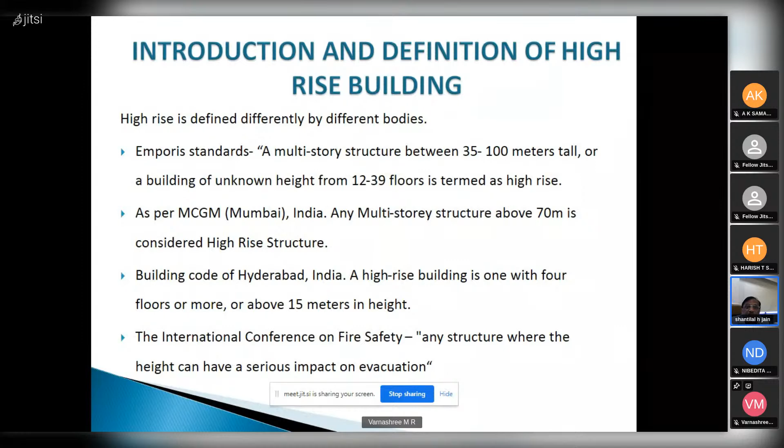The planning and then structure. Next slide can be taken. Next slide, please.

High-rise development: basically we have to consume FSI, and for that we are going to big heights. So planning, architecture and structure. After planning comes into the picture. In planning, small buildings don't play a very big role. We can have any type of structure, any type of layout, but the moment we go high-rise, the role of structural layout is very important.

Unfortunately, our architects feel that they know everything and they don't take structural layouts into consideration while planning, and they give it to structural, and structural engineers are in deep trouble to adjust that. And our engineers are very expert. They are trying to adjust. Then they ask the architect to change the plans, etc. So it is advisable that planning and structure both go together, especially for big buildings, tall structures, say 10, 20, 30, 40 stories. Next slide.

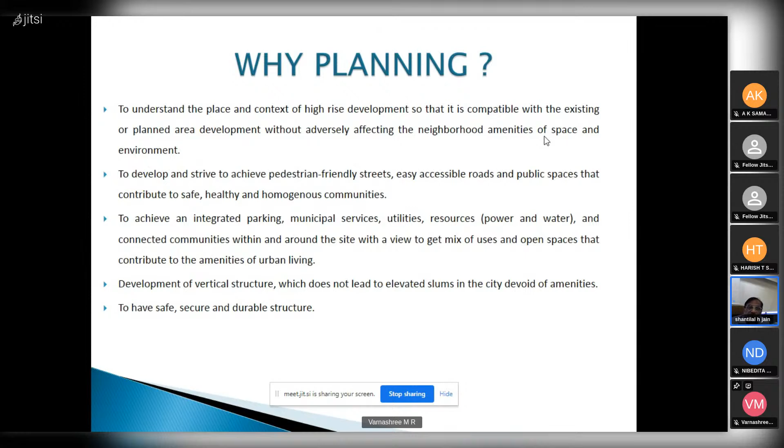These are the people we normally need: architects, structural engineer, PMC, MEP consultant, because MEP also has an equally big role in buildings. We have a lot of firefighting issues, water issues, lift issues, electrical matters, and these are to be designed properly at the time of architecture. Otherwise, what happens? The building becomes a mess.

After architectural and structural, sometimes what I have seen in the past, the building starts and after 5-10 floors are constructed, then we come to know that a lot of cutouts, a lot of openings, a lot of things are required to help the MEP people. So all four teams should come together. PMC, the person who studies drawings or site management, comes under our team; architect, engineers, MEP issue them drawings and they do the construction. Next slide.

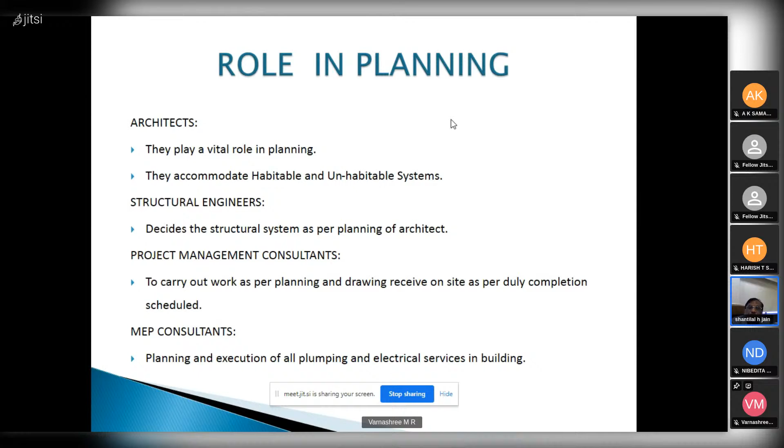So, in planning, one more thing is there: parking towers. A lot of problems have been created because of parking in placing columns, especially because you need a driveway, you have to park cars properly. Much car parking has been done, but unfortunately the efficiency of car parking has gone down. Where you should park 10, you are not able to park 5 because of bad planning and bad column and shear wall locations.

Now, what are the materials we are going to use for high-rise buildings? It cannot be load bearing like what we were constructing for our old ancient structures, because of the strength required, and speed, everything is required when we start a 50 or 100 story building. At present we are facing a lot of problems and we are taking 5 to 10 years to complete the buildings. So how to control that?

Considering all the things, maximum buildings are being constructed in RCC only. Then structural steel buildings, then composite material buildings. Few people want to go for composite. Most, 90% or 95% of buildings, are going with RCC only. Structural steel buildings are very popular internationally, but in India, unfortunately, we are not behind structural steel much. They are more used in industrial buildings, but in residential or commercial buildings, composite is being used at many places.

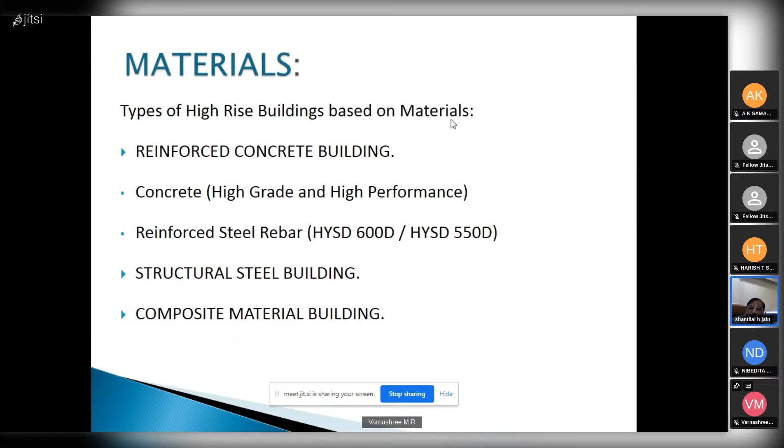The biggest challenge in the coastal area is corrosion of steel. The steel we are using gets corroded very fast. By the time you construct, if it is exposed, corrosion starts. So good builders and good agencies are many times getting galvanized bars, or epoxy coated bars are also being used.

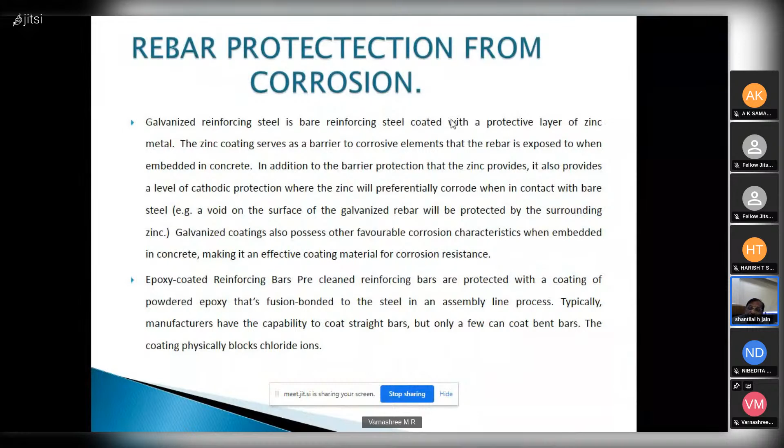But unfortunately, our people are more cost-conscious on the structure side, and they are liberal in putting more money into finishing items. So all of us decision makers should explain to our builders and architects to take proper measures to have good quality steel with some treatment. Next, sir. Next.

While doing structural configuration, especially in residential buildings, we get a lot of shear walls because most of the walls are helpful to us as columns. When the length becomes 4 times more, it becomes a wall. And from top to bottom, shear wall systems are very, very common. And the configuration is not decided by us, but by the architecture.

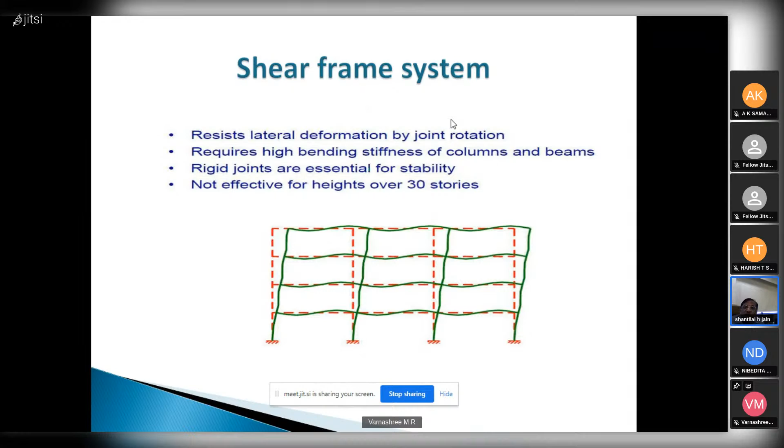See, every plot has a different shape, different size. So ideal structures are very rarely available. It is only in townships. But normally, based on plot size, and after marking open space, the architect will try to fit his plans. And then the structural engineer tries to fit in the walls and slab system, shear walls, columns, etc. Next, sir. Next slide.

See, when we design a building, we all know that gravity load is the lifetime load. In a residential building, hardly 10% is live load. In commercial, also hardly 15% is live load. 80 to 90% is dead load only. And so, as a structural engineer, first we should try to find a good configuration, adjusting all parkings, driveways, etc., and decide the column or wall sizes as per dead load plus live load, which is going to be the lifetime load.

Thereafter, the models are made in various software. It may be STAAD, ETABS, Midas, or many others. But nowadays, for RCC buildings, ETABS has become popular all over India and is extensively used by most consultants, and SAFE for foundations. STAAD Pro was used more earlier, but nowadays it is used more for space frame analysis and steel structures. After finalizing column and shear wall sizes, we run the models with wind load and earthquake load, and wherever deficiencies are there, sizes are to be increased.

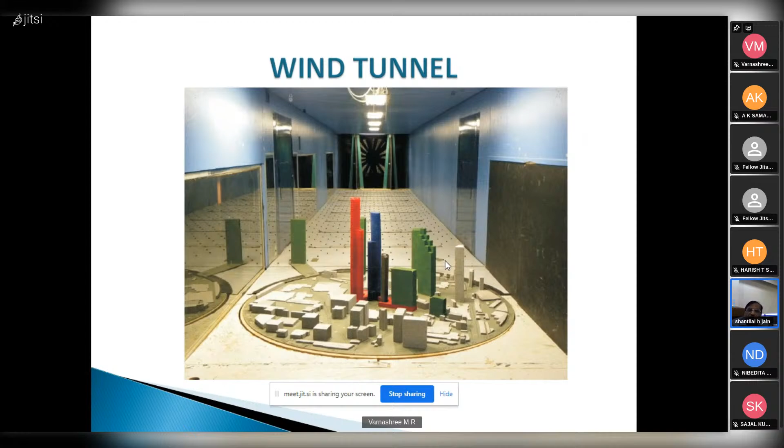For most of the buildings constructed, especially in zone 1, zone 2, zone 3, wind rather than earthquake will govern the designs. Once a building crosses 100 meters, it is wind load that is going to control your building. Next slide. I have already described this. Next.

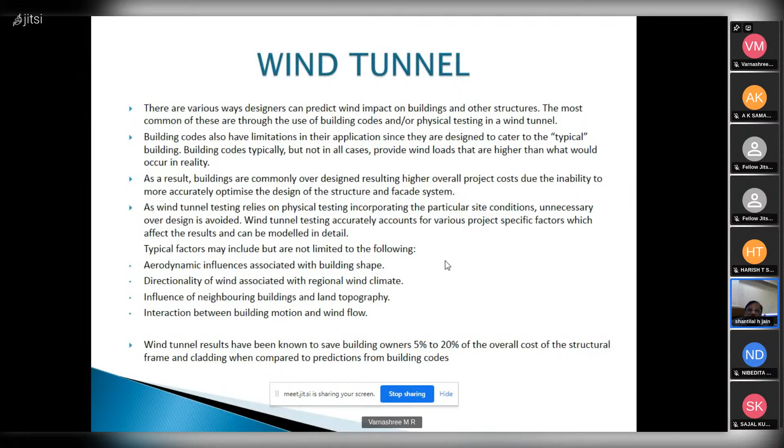When deflections are too high, how to control them? Dampers are used. That is also very rarely used. In a building behind me, there are 3 towers of 87 stories. In one of the buildings, dampers are being used in water tanks on the top floors. What is a damper? A damper tries to bring the deflected building back to its original shape as early as possible, absorbing the forces, so deflections are controlled. They are very helpful.

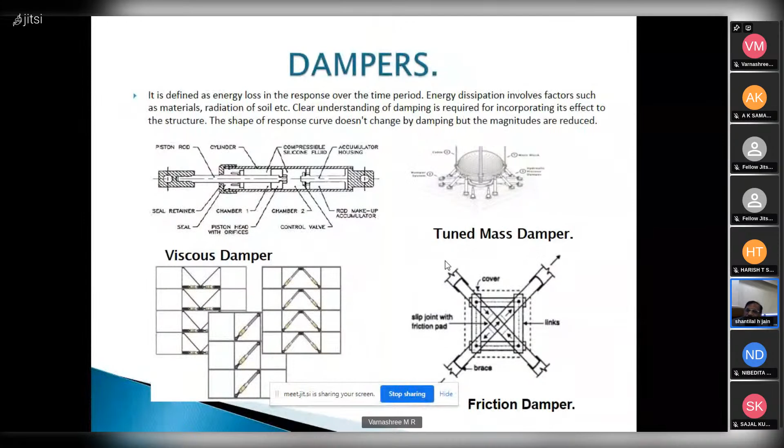In foreign countries, they are very common. But in Indian conditions, people want to save money. Structural engineers are pressurized not to use them, so we have to rely on structural elements to control the deflections. Next slide.

See, we have talked about shear walls and columns, how a column becomes a wall, becomes shear walls, etc. What about foundation now? For that, we have to first do proper soil investigation, at least a minimum of 3 or 4 bores. And as per the bore, where you get rock, drill at least 15 meters more to ascertain what sort of strata is there below the founding strata.

What are the common foundations? Rock foundation is very common, especially in Mumbai, because Mumbai has rock all over. If you go below 8-10 meters, you will get very good rock. But in many places in India you will not get rock. So pile foundation may be used there to transfer the vertical load to the appropriate place. Then, when the strata is not enough at our required level, we have to go for a combined raft pile also.

At present, what I have observed is that at least 2 to 4 basements are being constructed in Mumbai, and I am doing some work at Mangalore and other places also. 2-3 basements have become very common to adjust parking. Car parking is a very big headache for designers and architects to adjust, including the driveway and column positions, so expertise is required. And after 2-3 floors below, normally we get very good strata at many places, so raft becomes okay.

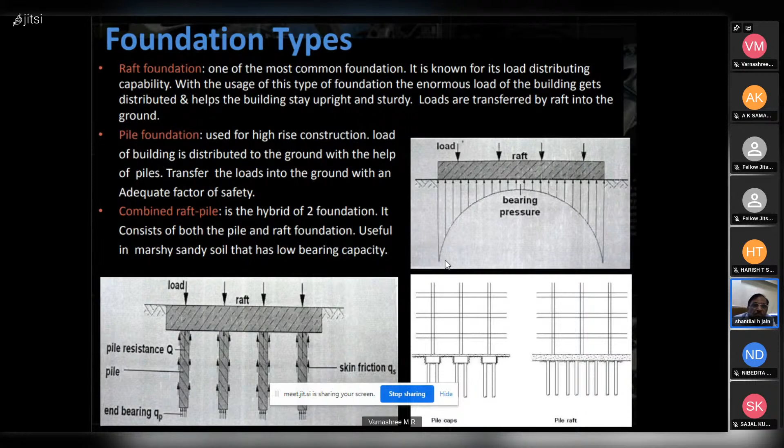Normally, earlier we were using wooden or steel shuttering for all buildings. But now time has changed. We want speed. For 40-50 or 100 stories, if you do not use proper shuttering, it will take more years. Nowadays many types of shuttering are available, but aluminum formwork has become very popular in India. One company introduced this formwork about 15-20 years back, and it has given excellent results and good finish. You can achieve a slab interval of 5 to 7 days, so 40 slabs in about 280 days.

The advantage is that slab, beam and column are concreted together. Normally we erected the column after the slab, and after completing the column we did beam and slab shuttering. But in aluminum formwork, from Mivan or other companies, and nowadays many local manufacturers in India, it is very fast. Everything is digital; you provide numbering and coding. Once you remove the shuttering and put it on the next floor, they claim 4 days, but practically within 7 days we are able to concrete the next slab after putting reinforcement.

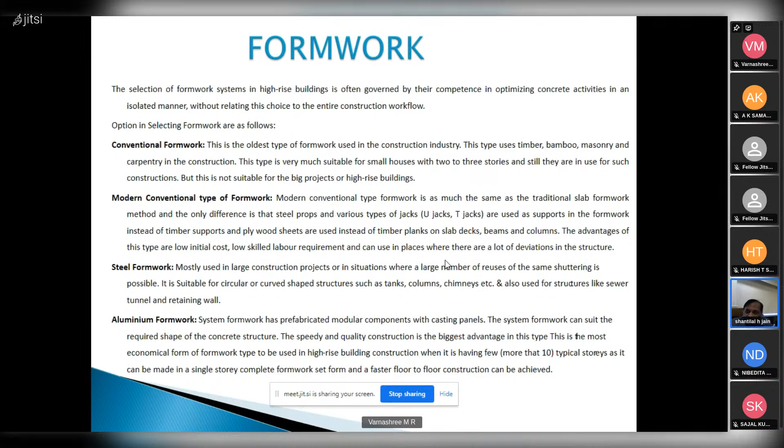For reinforcement on site, nowadays suppliers directly give you cut steel as per the drawings. That is also an advantage, since no fabricators are required on site, only tying rods. Material comes directly in the required size, bend and shape to site. Tata and many other companies are now giving reinforcement in bundle form. Next.

These are the various codes. But 16700 of 2017 is now getting implemented slowly in many places, and a lot of restrictions have come in this. If you go through 16700, many of my friends are there in the committee of 16700. Aspect ratio of building, slenderness ratio, now they have put many limits.

And now PBD, performance-based design, is also being introduced for buildings above a certain height, and where there is deviation from the code, PBD is required. At present, PBD is not popular in India, very rarely used, but in future there will be PBD, performance-based design, where your limits exceed codal values. You have to go for PBD.

At present, there are not many publications available in India, but I am president of the Indian Society of Structural Engineers, which we call ISSE, and it is now ready with one book we have written about PBD, and soon it will be launched. I will inform all of you whenever we have the function. The book is already printed, it is ready, and we will inform you. It will be very good material for all of us.

And in future, for big buildings and code-exceeding things, we will be forced to go for PBD designs. In the US and those areas, PBD is very common now. Next.

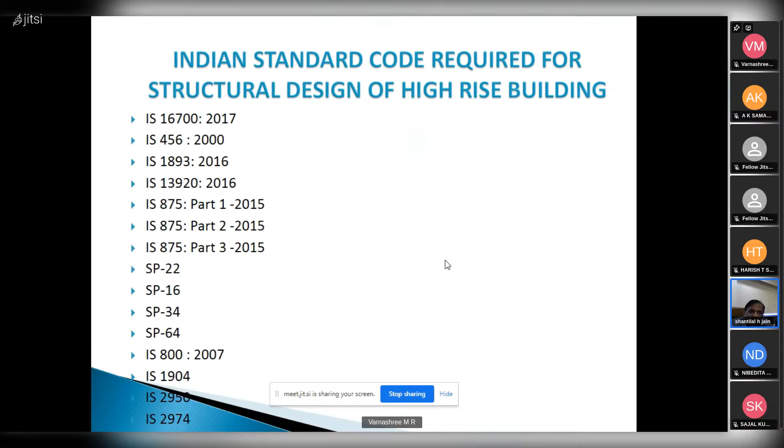See, I'm sitting in my office. Just behind me is this building. It is an 87-storey building. Originally, it was planned for 117 storeys. But because of civil aviation, it was restricted to 87. Probably it is one of the largest towers in India. And I am also involved in the design of this building, where the raft foundations were done.

And this is purely a shear wall structure, columns and shear walls. Lift walls are mostly used as shear walls. The core should be strong for any building. Normally in big buildings the number of lifts is very high, and that gives very good resistance to lateral forces. And this is one of the best examples in India, World Towers in Mumbai. Next.

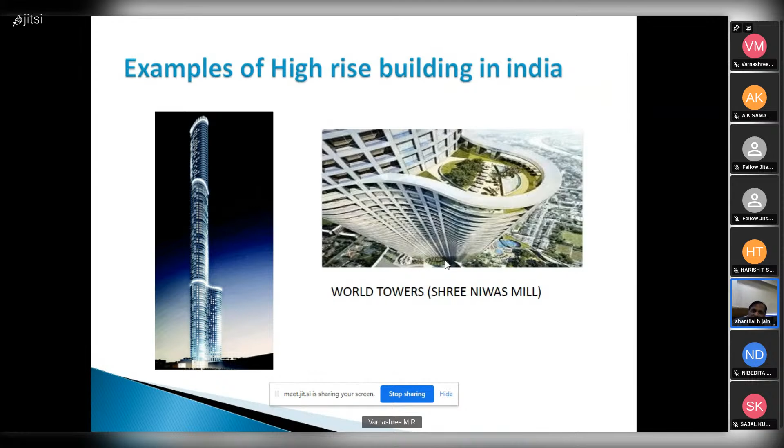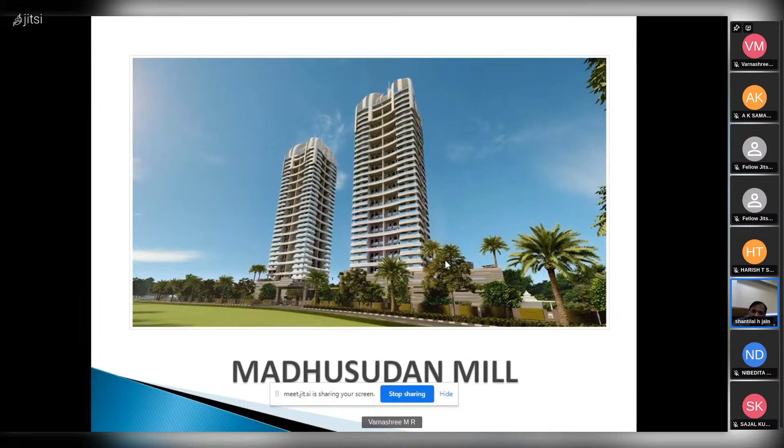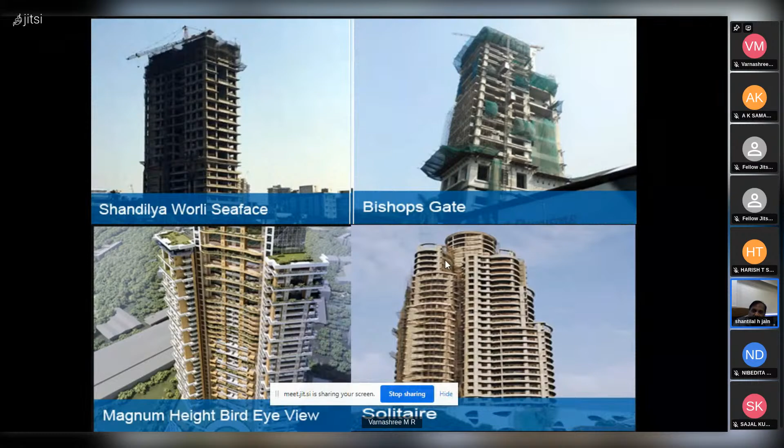See, this is very general, but challenges are going to increase day by day. You should be equipped to tackle all the problems. Big cities, especially Mumbai, Chennai, Kolkata, Delhi, Bangalore, will in future have a tremendous number of high-rise buildings, more than 30-35 storeys. And the government should also support this, because with high-rise buildings you will get quality air, quality atmosphere all around, and you will be able to create ground floor spaces for recreation. Otherwise, cities are drying, and high-rise buildings are going to pose a lot of challenges.

Construction, every aspect: architecturally it is challenging, structurally it is challenging, geotechnically it is challenging, environmentally it is challenging. And most buildings now are to be provided with an STP, and that is another challenge, because the STP is provided below the building, which is going to spoil your columns and shear walls if it is not properly planned. So that also we have to take into consideration, non-structural members, structural members, everything.

I think I have said within 45 minutes whatever best is available with me. I have shown a few buildings to you.

Any question you can have? Jain sir, thank you. I have one basic question.